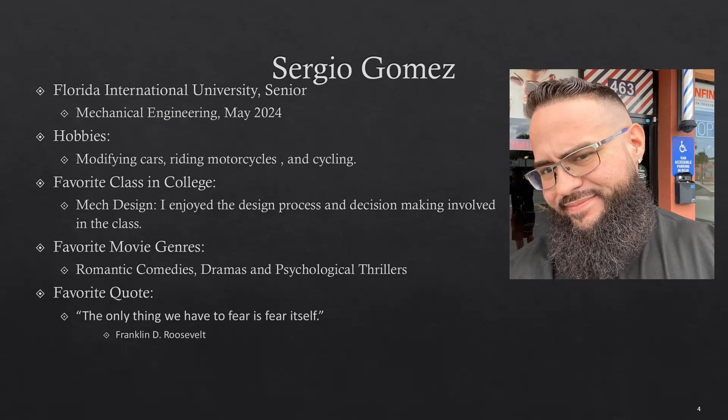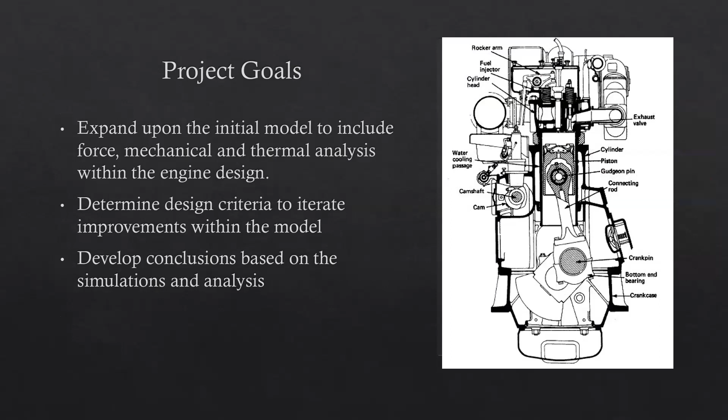In terms of the actual project that we're presenting today, the goal is to expand upon the initial model we did earlier in the semester that went just through the motion analysis to actually start critiquing the mechanical properties and thermal properties of the design. In order to do this, we actually chose to make some base assumptions. Instead of looking at the system as a four-stroke, we went for a two-stroke for simplification purposes, even though we're not utilizing the actual head of the engine for these testing.

The maximum crank speed was determined to be 13,000 RPM. The flame temperature is at 2,800 degrees Fahrenheit. The cylinder wall temperature is 375 degrees Fahrenheit. The ambient temperature within the system at cold is 293 degrees Kelvin. And the average piston face temperature is 575 degrees Fahrenheit. The maximum acceleration was found through our motion analysis and ended up being 64,757.127 meters per second squared.

The piston mass was also calculated through the SolidWorks simulation of 478.97 grams. The maximum force was calculated by determining mass times acceleration, which ended up being 31,016.721 newtons. The dimensions for the engine are 52 millimeters for the stroke and a piston diameter of 70 millimeters. That gives us a cubic displacement of 200 cc's.

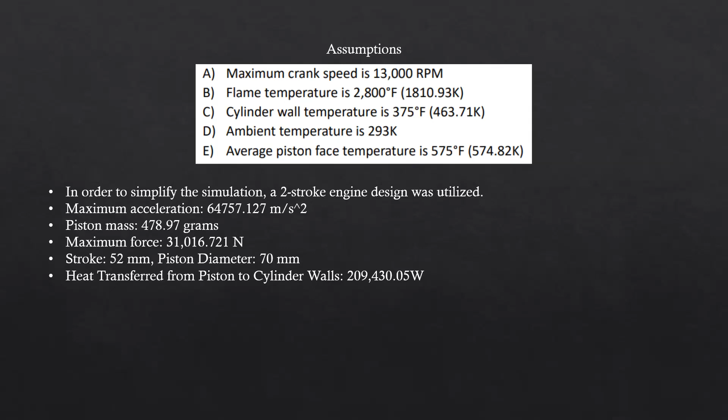And then we also found the heat transfer from piston to cylinder walls equivalent to 209,430.05 watts. And that was actually by using a Taylor correlation and then looking at the characteristic gas velocity, factoring in the RPM and the stroke to come to that analysis. That's all presented in the actual report. We're just going through the simulations here.

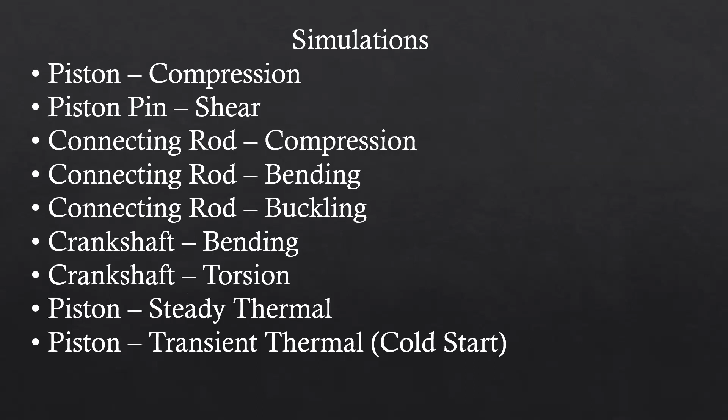These are all the separate sections that we will be covering: piston compression, piston pin shear, the connecting rod compression, bending, and buckling, the crankshaft bending, torsion, and then the piston's steady thermal and transient thermal from a cold start perspective.

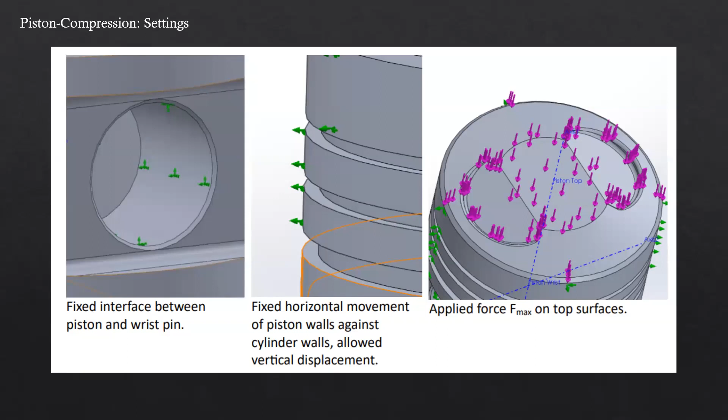The settings for the piston compression are presented below, where we have the fixed interface between the piston and wrist pin. We also have the fixed horizontal movement of piston walls against cylinder walls, and they allow for vertical displacement. And then the applied force is on the top surfaces. The material is an aluminum alloy 4032-T6 with a yield strength of 3.150E+08 pascals. The results are presented below. We ended up coming in with a minimum factor of safety of 6.

Now, this is actually excessive, and we do recognize that the mass of the piston is significantly higher than a traditional configuration. Most of the examples we found online were somewhere in the neighborhood of 200 grams versus our 400 plus, which is what's leading to this high factor of safety. In an additional redesign, we would consider shaving additional material off the side of the skirts, but for simplification purposes, we decided to proceed with this model of the engine.

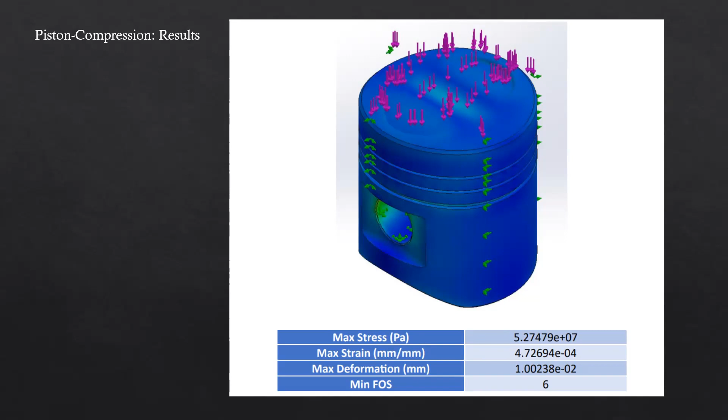In terms of the material, we actually had to do an iterative process because at first we used an AISI 4130 steel that was annealed at 865 degrees Celsius. It has a yield strength of 4.6E+08 pascals, but the stresses were significant. And what we ended up doing is we normalized a range of thicknesses between 2 and 6 millimeters with 0.5 increments.

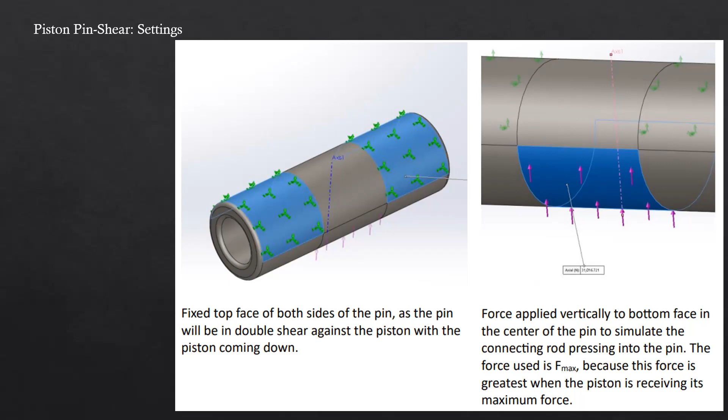And we ultimately found AISI 4340 steel was the appropriate one with a 3 millimeter wall thickness. That ended up giving us a minimum factor of safety of 1.2, which is just above where we wanted to be. Ideally, we would have wanted to be closer to 2, but this does work for our application.

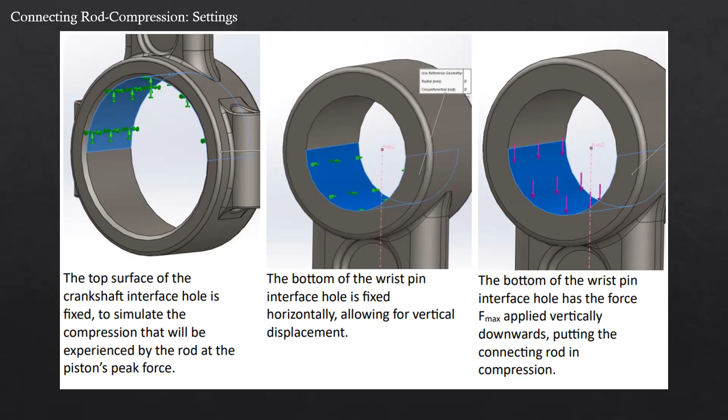Moving on to the compression. These are the settings for the compression of the connecting rod. The connecting rod material is 4340 steel that's also annealed. And if you look at the bottom of the wrist pin, its interface hole is fixed horizontally, and then the top surface of the crankshaft interface hole is fixed, and that's where we will be simulating the compression across those two sections. The results end up giving us a minimum factor of safety of 1.4, which is in line with where we wanted to be.

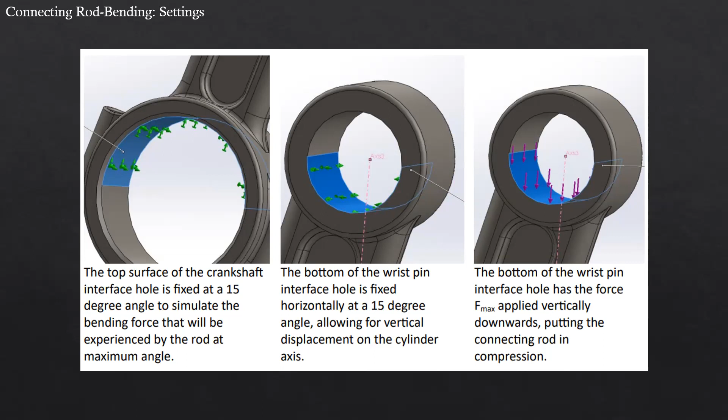Now, for the bending settings, we actually had to set the connecting rod to 15 degrees. That's the maximum angle, and that actually correlates to a downward piston force of 7,655.5 newtons. With those settings, we end up getting a minimum factor of safety of 4.5, which means this rod will not bend within our application.

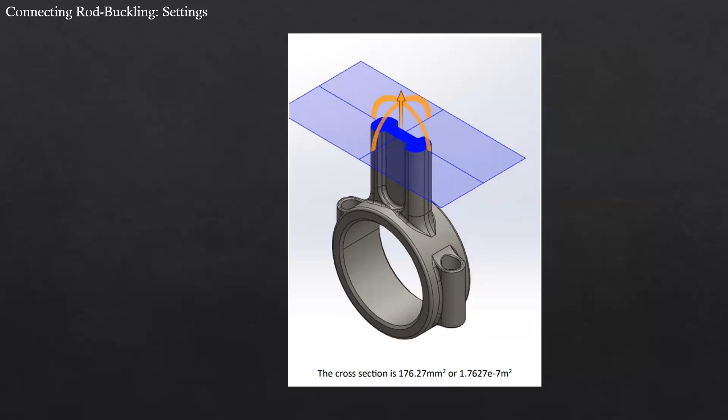The next thing that we did was we went to the buckling settings, and we had to cut the cross section, and we did a cross section through SolidWorks and came out with 176.27 millimeters squared for the center section, where we are going to be doing the buckling analysis. The buckling analysis presented with a very high load factor of 45.157. There is no likelihood that this connecting rod will be buckling in our example.

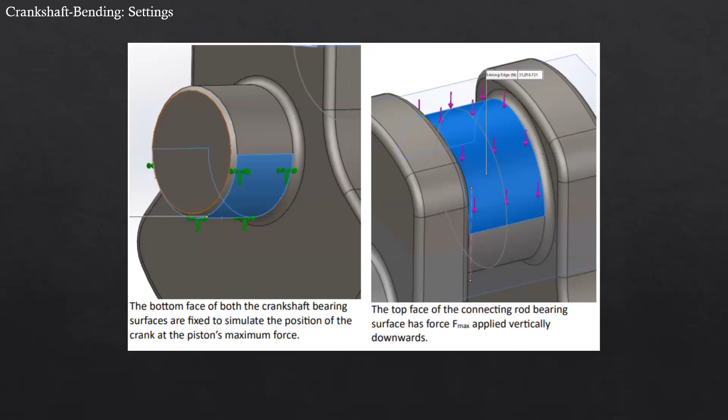Moving on to the bending of the crankshaft, we chose a 4130 steel that was annealed at 865 degrees Celsius. You can see here where we went ahead and did our fixturing on the top face of the connecting rod bearing and the bottom face of the crankshaft bearing. We ended up with a minimum factor of safety of 3.4, which means that we are well in line with not having any limits within the design.

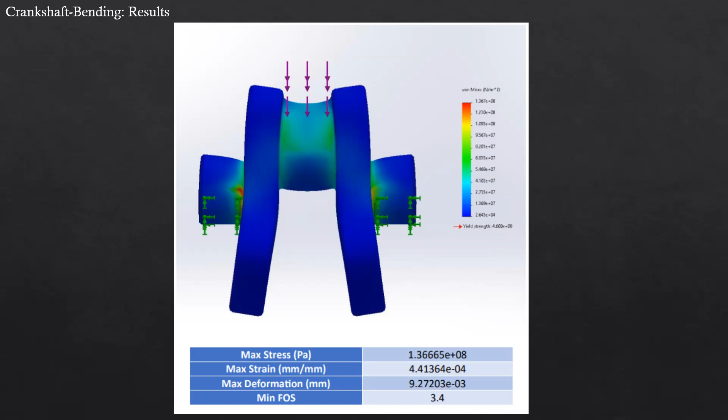We could potentially reduce material from the crankshaft to lower our factor of safety to increase responsiveness from the motor and have lower costs. Moving on to torsion, we ended up finding that the angle for the connecting rod of 15.069 degrees was applicable here. So we applied that force in that direction. And then these were the fixturings that we did. With the torsion results, we end up with a factor of safety of 5.7, which means that we will not be dealing with torsion issues with our crankshaft.

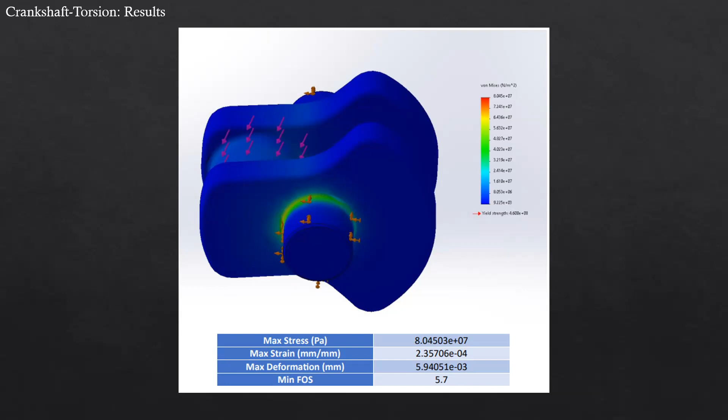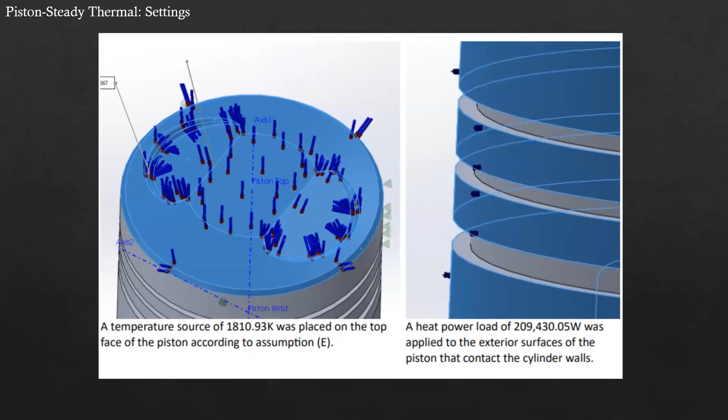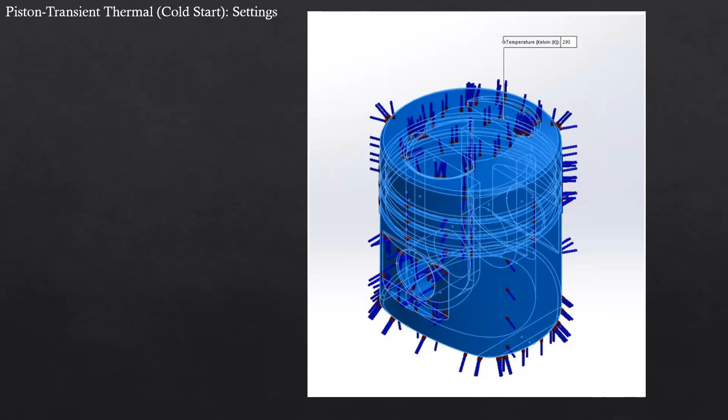The next section is the thermal cold start. In this case, it is a cold engine where we are doing an initial temperature analysis with it going through the cycles for the first 0.1 seconds in 0.01 seconds with 10 time steps. We set the part to 293 Kelvin, which is normal temperature, all throughout its phases. And then in the next screen, we actually present the actual steps. If you notice, within that second, there is no fluctuation in the temperature. It stays consistent throughout the entire body, which works very well for our application.

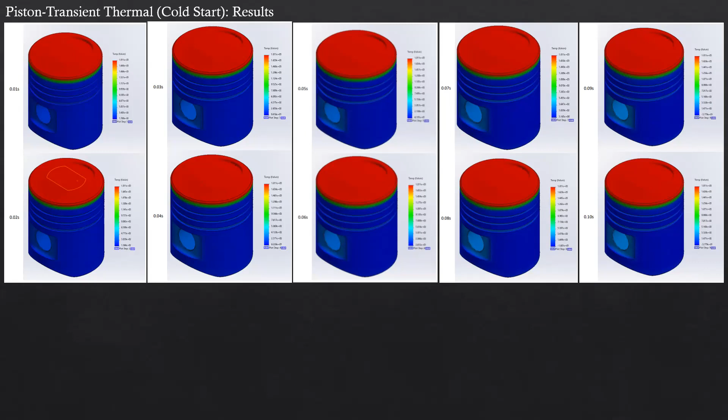In conclusion, we found that the system worked very well. There were some hindrances that we should consider for the next process if we were to actually proceed forward with designing this motor. The first one, dropping the actual mass of the piston, potentially also changing out the mass of the connecting rod and crankshaft, we could substantially save in our factor of safeties. The one area that we could improve on is changing material selection for the piston pin. The factor of safety there is a little lower than what we initially wanted, but it does work for this design. Thank you very much.